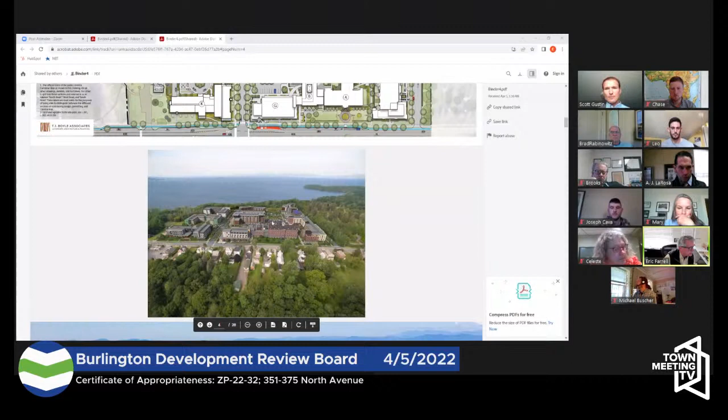It now encompasses, there's a building I on a separate lot back here. So now Aurora is all 3 of these buildings, and then it L's over like so. Building F is in this location, building E is approximately here, or was, and then building I was a separate building, although they were all connected. Liberty House, of course, and then building Q and R, well, let me give you a different view. So this is Liberty House. This is the building we completed in 2020. All apartments, market rate apartments.

Cathedral Square is completed and occupied. Champlain Housing Trust is completed and occupied. This building here is under construction. We're not proposing any changes to this building in the back. We're not proposing any changes to this building here, building H. There's a small change that we're asking for in this building. And the only change in this building here is it's the same building, it's just straight now instead of curved. If you look at the previous approval, it was crescent shaped. And now it's essentially the same building, but it's straight.

And the intention was to open up the view shed even more for Liberty House straight to the lake, which wasn't a zoning commitment, but it was something that we committed to at the outset. This is what you approved several years ago. You can see this building Q is on a curve. Building I, a separate building. Building E at the time had a north-south orientation.

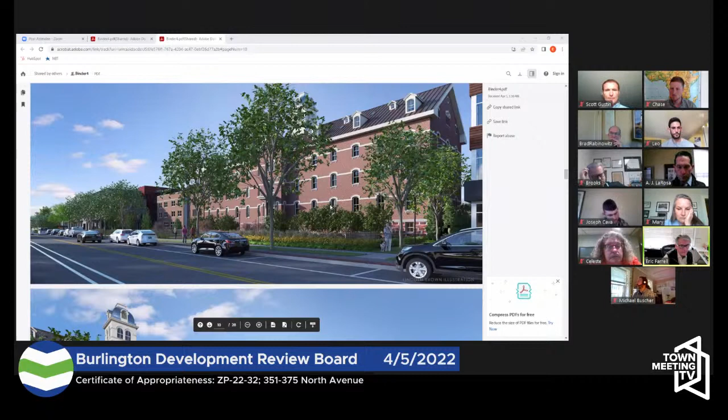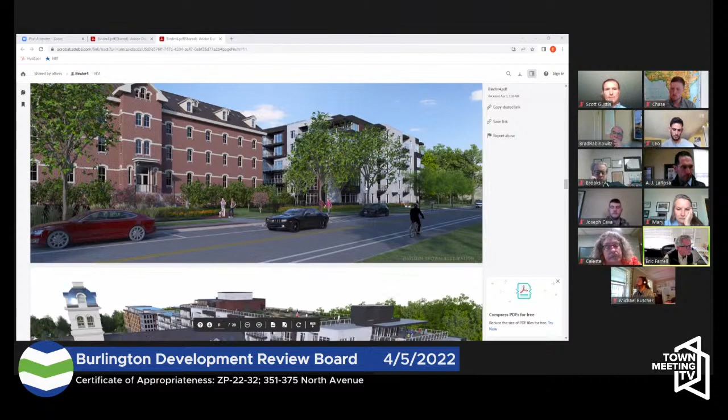And another view of Liberty House with the street-facing portion of Aurora on North Avenue. A little different perspective of the same relationship between the two buildings.

We did have VHB do a historical review of the impact of this building, even though there was a prior approved building here, it wasn't quite as large as this one. Historic impact, and they submitted a pretty comprehensive study that was favorable, I believe, to us and how we're proposing to move forward.

You can see down the alley between Liberty House, and Liberty House is still the iconic building on our site. It's the tallest building on our site, always will be. This is a view from the west looking back towards North Avenue between Liberty House and Aurora. If I haven't said so, Aurora is condominiums, not apartments, 192 condominiums.

And this is a view of Aurora at the corner of what we call North Road, although it's all Cambrian Way, corner of North Road and North Avenue. And you can see Liberty House, of course. We are excited about the fact that we're putting community gardens on the roof, which is kind of unusual anywhere in Vermont, for the benefit of the people that live in that building. We have a sunrise veranda on the 5th floor.

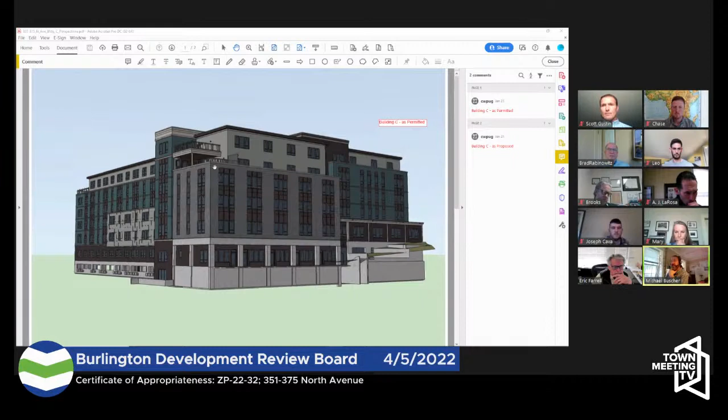So you should be looking at the permitted version of building C, and the area that we're looking at is this area right here. So there is a deck here that would be retained, the lower deck would be eliminated, and this area would just get filled in with additional units. And I think M is in this bunch. It's not.

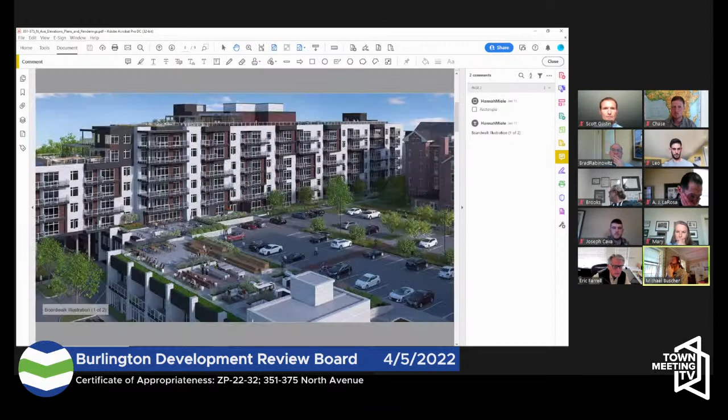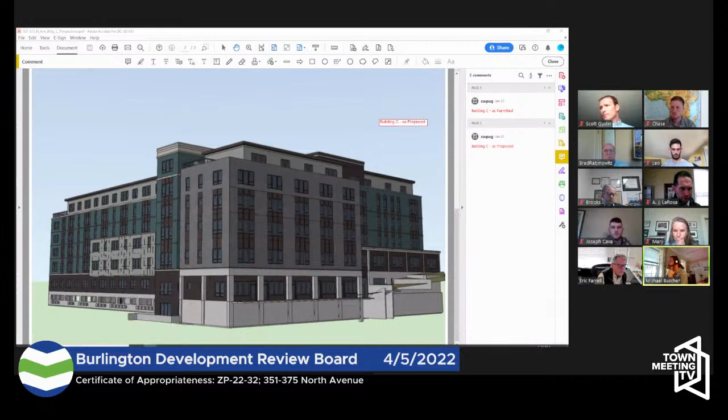Well, actually, probably the easiest thing for me to do is to share, because there's some very last minute changes with building M and their updated elevations here. Really, this is the street facade. The change on building M is this unit right here was originally a deck in a common space, large common space.

So this is the north facing elevation that's facing Cambrian Way. This is the west facing elevation that is facing towards the lake. So this would have been recessed more on this elevation, and you wouldn't have building here on the north facing elevation. Mike and Eric, I did include the originally approved rendering of building M in the staff report. If the board members wanted to scroll through the staff report, those changes to M were noted with images.

I also have the prior building M in the board's packet, and it's noted as prior amendment for buildings M, Q, and R. Right. Yes, that's it. I'm not certain if it's the most recent amendment of this afternoon, Eric, but that reflects your new volume on the top of, on the northwest corner of building M. Correct. There's 2 units that we added, and I think the picture below is the prior approved, right?

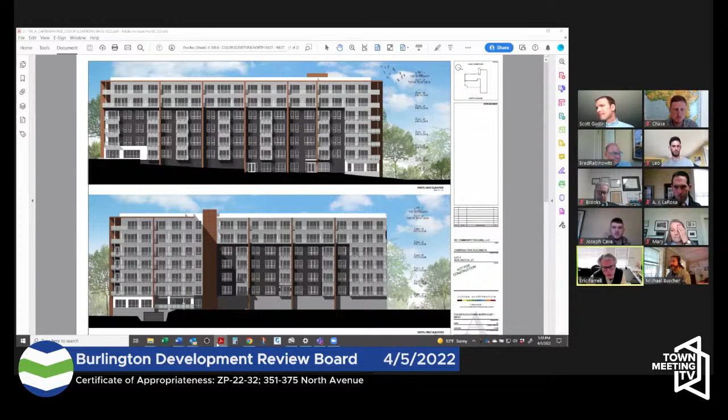Yeah, so that's a significant change, right? Well, those 950 units got to go somewhere. Right. I'm just mentioning it is a significant change on North Avenue. Yes, and we hired Britta Tonn at VHB. There's been a couple of historic reviews of this project along North Avenue, and there's a couple of other significant structures on North Avenue, the chapel to the north being one of them. She's very competent. She did a comprehensive review, and the layman's conclusion is that it doesn't detract from the prominence of Liberty House.

And of course, when we set sail on Cambrian Rise, it was intentional that the ordinance was rewritten and the height regulations were established to allow us to do what we're doing. That was in part in compensation for the fact that we sold 12 acres, a third of our site, to the city. And I said, I'm happy to sell you a third of my site, but I don't want to lose development opportunity as a result of it. So they rewrote the height ordinance. And so it's always been my assumption that I could build what the ordinance allows. And in the original application and review, there was a lot of discussion about streetscapes and things like that.

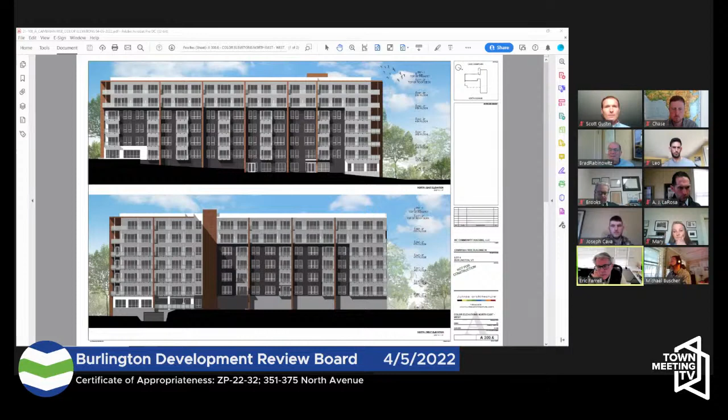Yes. Are you trying to tell me in a roundabout way how spectacular you think this building is? We'll go with a roundabout way, sure.

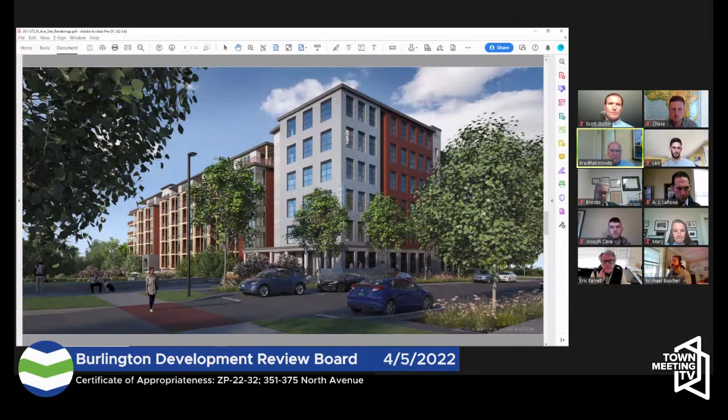So I don't know if there's more things you want to add. I just wanted to clarify that one thing. Do you have more information you want to add, because I know there's a few other things in there. Well, I'll let you continue with your presentation. No, I didn't want to drag you into the weeds. I just wanted to give you a cursory overview and then respond to any questions you have.

Okay. Well, there are a couple of things I wanted to ask about, and maybe other board members have other questions. One of them is phasing. There's a comment that you're not planning to change the overall phasing of 10 years, but you're 5 years into it. So are you still planning on completing it in 10 years? Well, yes. You know how old I am, Brad? I'd like to be done in 5 years. That doesn't mean that we won't come back and ask for an extension, but right now I think we're on a track where we could be done in 5 years. So I have no reason to ask for an extension at this time. Okay.

And there was just one other comment: the trip generation decreased, and that was basically because of a decrease in commercial area. Correct. Where was that commercial area that decreased? Where was it located? Yeah, how much decreased? I guess I missed that.

Oh, boy, I think we had something in the order of 100,000 feet of commercial space at the outset. And, you know, I can tell you in a minute what it is now, but it's substantially less. Here's the use mix in your packet for board members. Total commercial space.

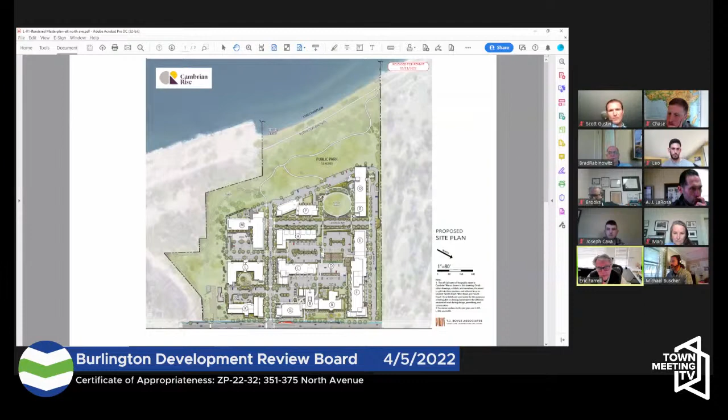And so basically you can get from North Avenue to the bike path at no more than a 5% grade. So that was a commitment we made early on, it hasn't changed. And our bike path connection, we made a commitment early on, it has not changed. Okay.

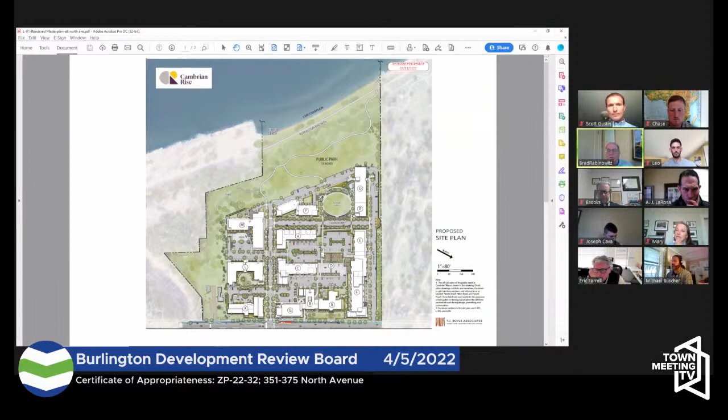One issue, this was a comment from DPW, Eric. Originally, I remember there was some comment about when, I don't know what the right terminology is, but infrastructure would get completed at the intersection where you're building that bus thing for a signal and other road changes. Yeah. And I think the intention was that would happen by now, and it hasn't happened. And DPW is asking for that to happen within the next series of construction. Well, I responded to Laura about that this afternoon, copied Scott.

And so one significant thing that happened after this board approved this project originally, we went into discussions with DPW for several months, maybe a year or more, about reconstructing the entire frontage of North Avenue, upgrading all of North Avenue consistent with the North Avenue plan. So we're widening North Avenue to put parking on the west side. We enlarged the intersection. We created a pull-off lane for the bus.

So doing all of that infrastructure affecting that intersection separately is not practical. We can't put a traffic light in until we do those improvements, and those improvements all have to be done as one consistent project. So the other thing in my response to Laura was that we're not even close to meeting the warrants for a light. I know DPW originally wanted it to blink for a while.

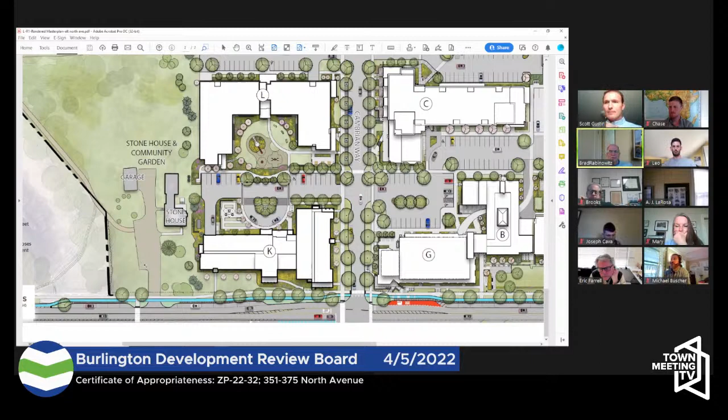Sure, this is Jane Hagan. I live at 372 North Ave, right across from Building B. I originally had questions about parking. I think, Eric, you've answered most of those. It seems like there's still not enough for residents there, but I also had questions on the parking. Trying to get the name of the CR Transportation Demand Management Plan.

It identifies that parking will be, what's the wording? It will be unbundled from residential leases and deeds. So it sounds like if you're renting at any of these buildings, you're not guaranteed a parking spot. It's free for all, for lack of a better term. And no parking spaces will be available to off-site users. I'd just like clarification on what that means. Either is there no guest parking, or if there is commercial space, how do consumers access those spaces if they don't have parking?

I can speak to that briefly. That's a standard in Article 8, and it basically means Eric isn't running a parking lot for off-site users. Got it. Thank you. You want me to address Jane's other questions, Brad? Yes, please. Okay.

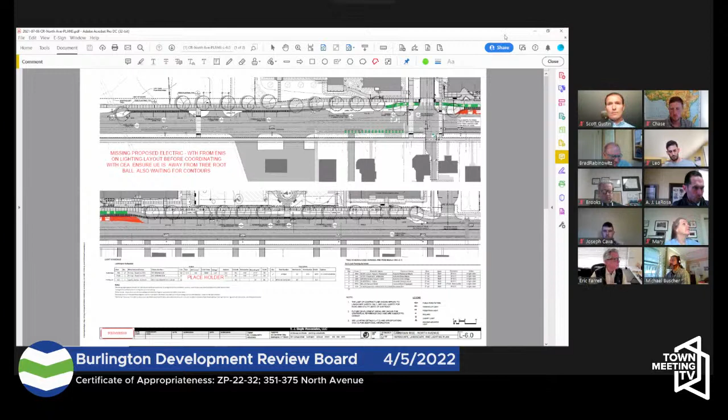Great. I'm sorry, Brad. Can I just make one more comment? Sure. I'm happy to have increased housing options. I am concerned about what they're going to cost, and wanting to make sure that there is availability. Like you said, the 25%, that's great, but also just market rate for working people right in there so that it's affordable for regular old Burlingtonians. Thank you.

Leo, are we getting some feedback somewhere? Okay. But I have one follow-up question right now because it seems relevant. Eric, you're talking about having the completion of Aurora trigger some of these things. Is Aurora the next building you're building? The next building we're going to start is building C, approximately the 1st of May. We were supposed to start building C in March of 2020, and you can probably guess why we didn't. So we're finally getting to build that building out. Aurora hopefully will start in the fall. So it could be 3 years before that North Avenue stuff gets addressed.

Well, Aurora will likely be occupied in 2 phases. The first phase would be occupied somewhere between 18 and 24 months after we start. So if we were to start, say, in September, October of this year, it would be occupied in the spring of '24. I don't want a hard date because I'd rather have it tied to Aurora, but June 30th, '24 is more realistic than June 30th of '23. But I'm comfortable with you tying the intersection improvements to the occupancy of the first units of Aurora. I think that would be fair.

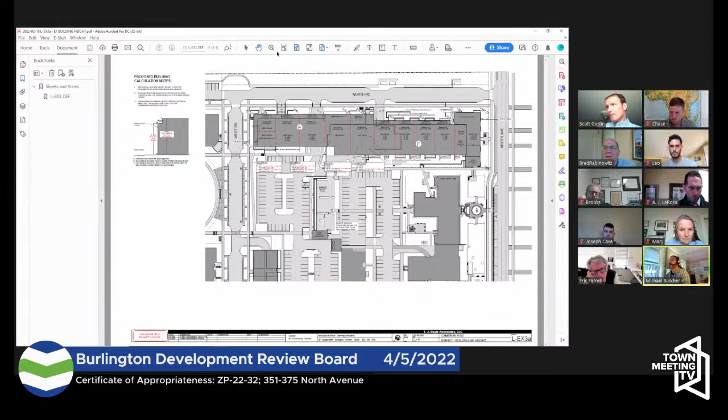So this front portion is lower. It's five-story facing North Avenue, and then it steps back. And it was 4 stories facing North Avenue. Can you give a number on that? Yep. Just give me 1 second. So this roof elevation is 287. So like I said, it was 258 before. So that's almost 30 feet higher. I'm curious, and then this corner down here is 274. Yeah. Let me find an older height plan and I can do a comparison.

Of course, Brad, part of the reason for that is that the ordinance, the way it was written, encourages us to be close to the street. I understand that. I'm just going back to the original conversations that were had about streetscapes and building heights and things like that. These were comments that were made before. And I think there was attention paid to the relative height between this and the eave on Liberty House, and now that's not happening anymore.

My only comment, Brad, would be to say respectfully, I don't think anybody could have been more respectful to Liberty House than the mountain of money that we poured into restoring that building. And it's still the prominent building on the site, and people love living there. So I agree, this is a tall building next to it, but I think that's okay. So if I may, before you jump in, Michael.

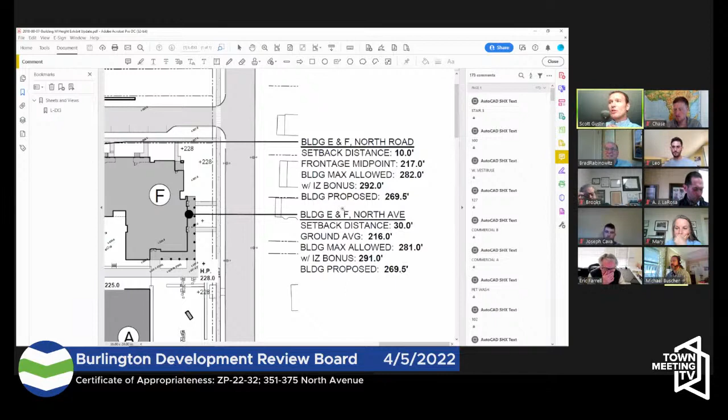Okay. So section 9112 of the ordinance, and I can do a quick screen share if need be. What it says is that any project with inclusionary housing units shall be entitled by right to an increase in the maximum lot coverage, density, intensity, and where applicable, height allowed for the lots in which the project is located. And that was intentional wording put in place by the city council when Article 9 was reworked a few years back. You're saying by right, Scott? That's what it says.

Well, that quiets me, Eric, but doesn't change my opinion. No, listen, I respect your opinion, Brad. I really do. Yeah, okay. But the only thing I would say is if you can't be with the one that you love, love the one that you're with. Thanks, Eric.

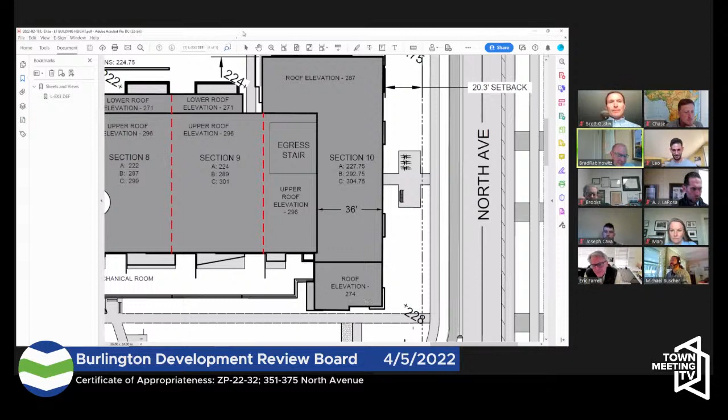Okay. So let's see, I think we covered most of the questions here that we had that I can see on this. Are there other questions from the board? I can't see. Maybe we can not do the screen share and just show the board again, Scott. Yeah. So any other questions from the board on this application? No? Okay.

Maybe we could just quickly go over the full scope of what we're being asked to approve. I like that. Yeah. So let me go back. So it's a great big project with lots of pieces. And this is an amendment to the project as a whole, as a planned unit development. You're being asked to approve the increase in dwelling units, the physical building changes, the fairly inconsequential, that's my editorial, change in commercial space, and the maximum parking waiver. And your decision should address Public Works concerns about the infrastructure.

Okay, any other questions from the board on this? I suspect we will then deliberate tonight on this. Eric is not on the screen anymore. I see that. Sorry, Brad. Eric's got his hand up. Yeah. I have one clarifying question. So Scott, given that there's no density in this district and the density is controlled by my development agreement, is the increase in density really what they're reviewing, or is that?